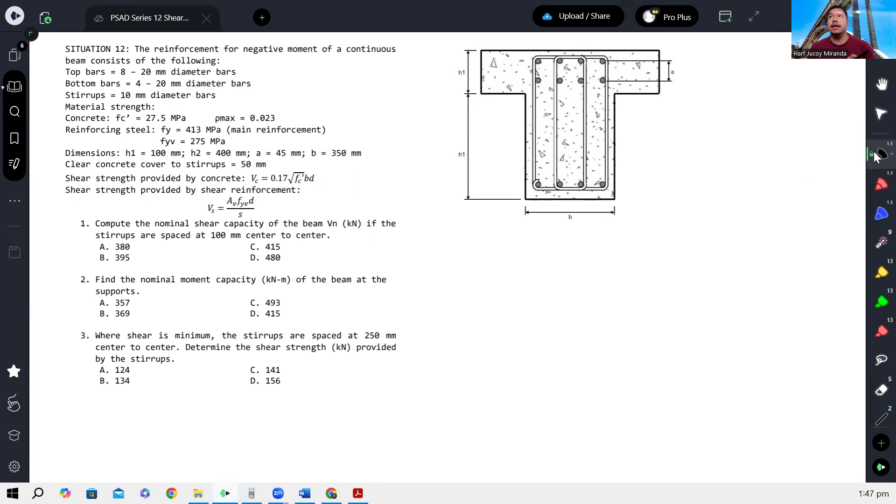Let's start. To calculate the nominal shear capacity of the beam, given the spacing, first we need to understand that when we say beam, the shear forces are vertical. So we expect the shear force to be vertical like this.

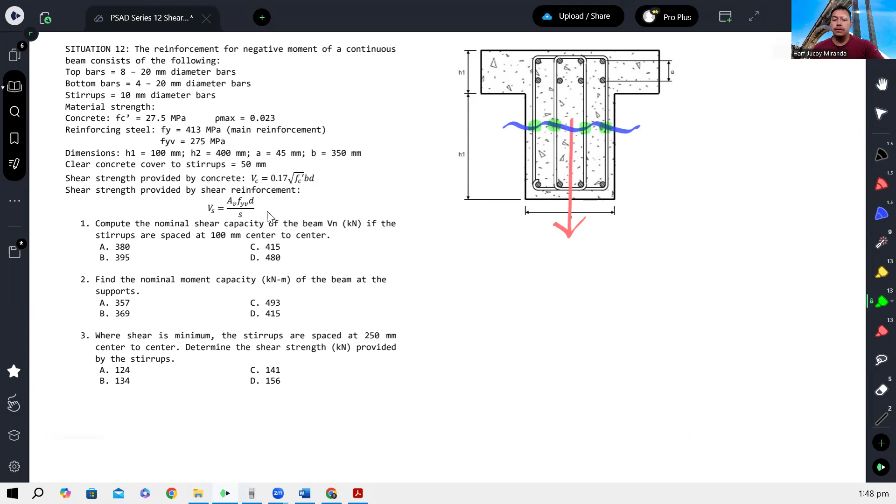To calculate the effective depth, given these dimensions: H1 is 100, H2 is 400, and this is 350. This is A, which is 45.

Now we need to find the effective depth. Recall that the effective depth is measured from the extreme concrete compression fiber to the reinforcing steel in tension, to the centroid of the reinforcing steel in tension.

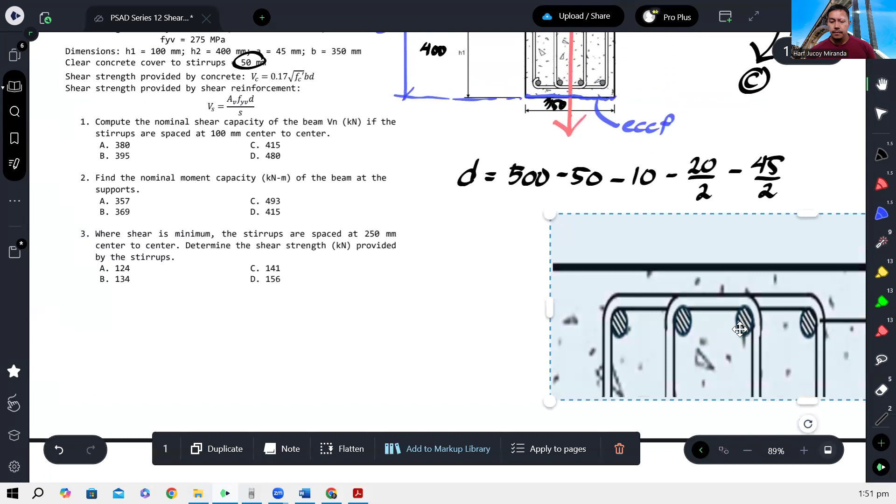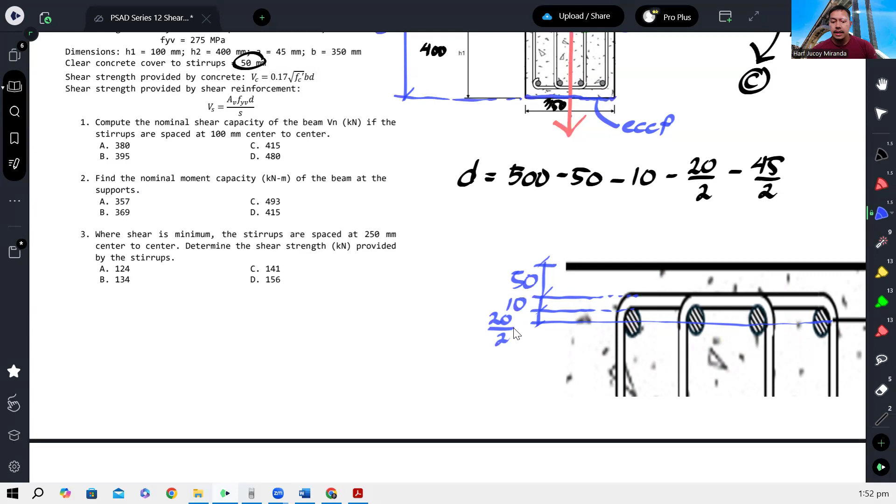So we subtracted down to here, which is the clear cover of 50. Then from here to here is the diameter of the stirrups. Then from there to here is the centroid or radius of the main bar, which is 20/2. And here, the centroid is somewhere here, which is half of A, 45/2. These are all the values subtracted.

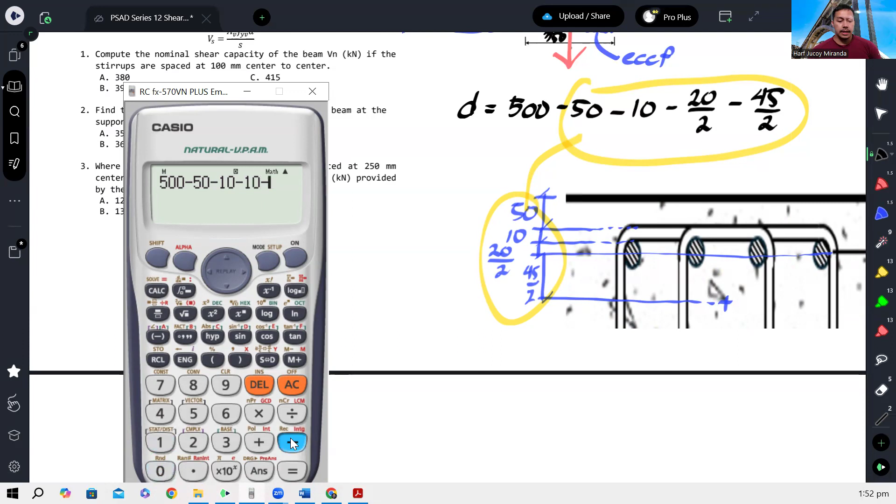So that's the effective depth. Let's compute it: 500 minus 50 minus 10 minus 20/2 minus 45/2, which gives us 407.5 millimeters.

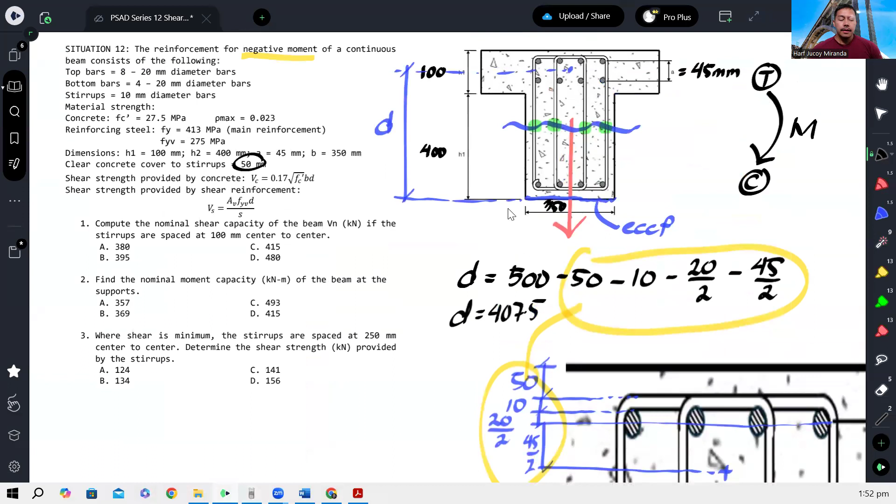Now we can compute the shear strength provided by the concrete first. VC is 0.17 square root of FC prime, where FC prime is 27.5, B is 350, and the effective depth is 407.5. We divide by 1,000 to get kilonewtons: 0.17 square root of 27.5 times 350 times 407.5 divided by 1,000, which gives us 127.15 kilonewtons. That is the nominal strength provided by the concrete.

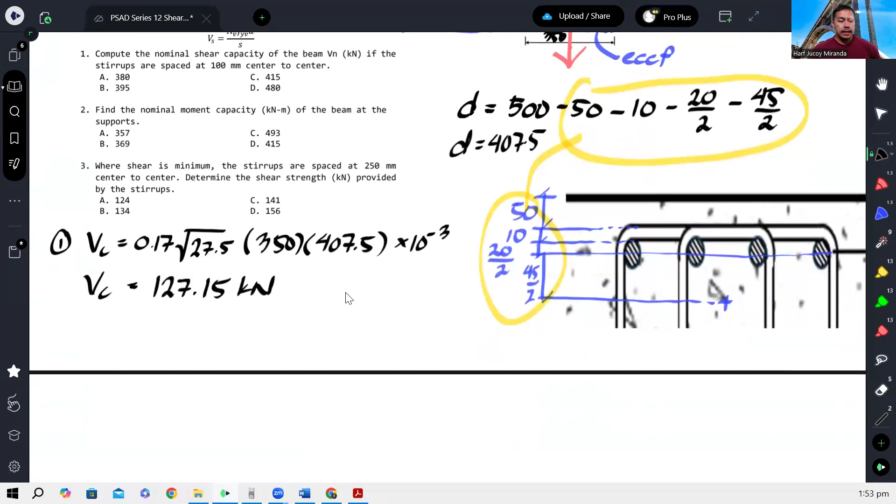Next, let's compute the nominal strength provided by the steel, which is AV FYV D over S. For AV, as mentioned earlier, we have 4 legs resisting the shear force which is vertical, since when the shear force is vertical, the crack is horizontal, and this is the path of the crack.

Yung dadaanan ng crack, yun yung pagbilang natin nung dami ng stirrups na kasali na kukontra dun sa crack. Okay? So that would be 4. So 4 na.

Pi over 4, ang diameter ng stirrups ay 10 squared. Fy ng stirrups ay 275. And then the effective depth is 407.5 over the spacing.

Ang given na spacing for this item ay 100. Again, multiply lang natin to or divide lang natin ng 1,000 yan para maging kilonewton. So we have, so computing ko lang, okay, so our shear strength provided by the stirrup is 352.05.

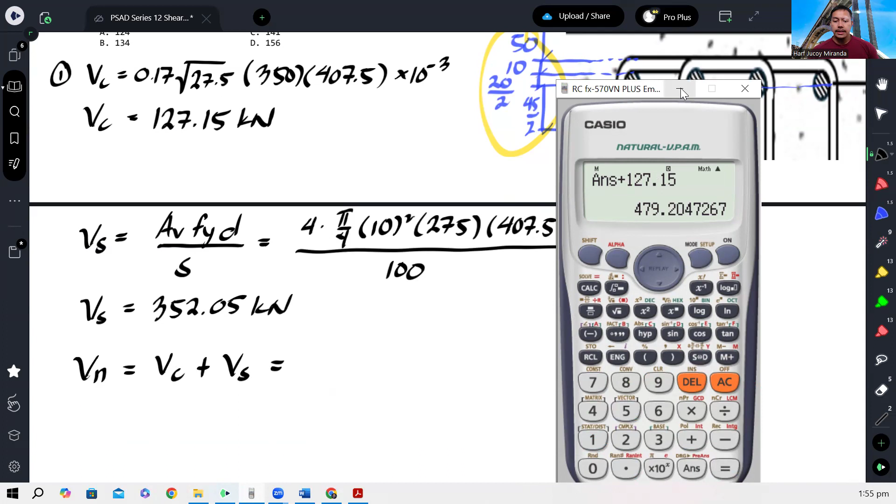Okay, kilo Newton. So therefore, our nominal strength would be yung nominal strength ng concrete at ng steel. So plus 127.15. And that gives us 479.2 kilo Newton. And that will be our answer.

Okay, so dito mag-iingat ha. Ang tinatanong lang kasi ay nominal. Kaya hindi natin kailangan mag-multiply ng reduction factor na 0.75 kapag shear. So ang sagot na natin dyan is letter A. Ay, sorry. Di pala. Letter D pala. 480.

Next, number 2. Calculate the nominal capacity of the beam at the supports. Okay, so at the supports, ibig sabihin, ang ibig niya sabihin dito is, di ba kapag continuous, sabi niya kasi continuous yung beam eh. And continuous.

So di ba pag continuous, kunwari lang ito ha. Ayan, yan kunwari yung beam natin. Di ba kapag continuous, ang mangyayari, may reaction dito. Okay, tapos ang elastic curve niyan, ganito.

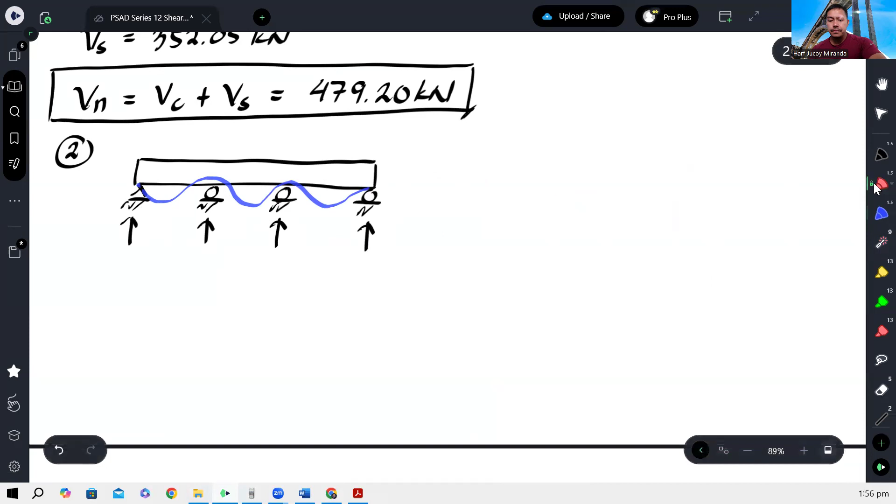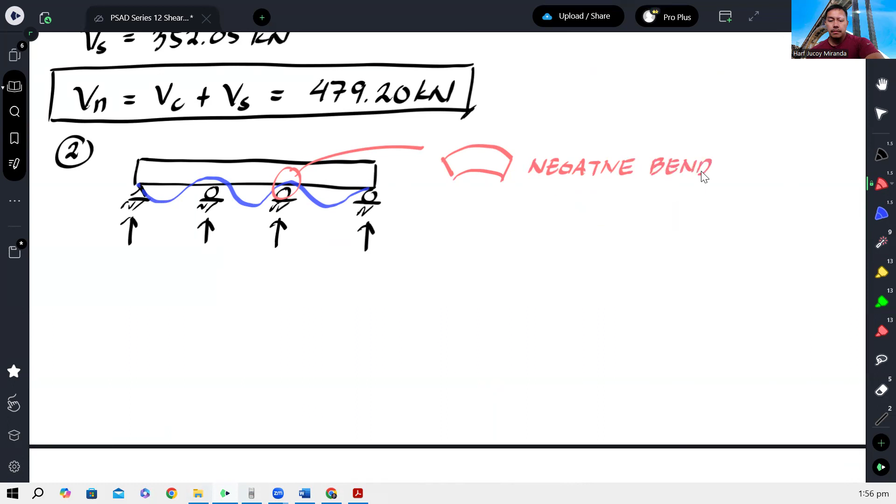Okay, so dun sa support, kung mapapansin natin, okay, yung beam natin is nag-bend ng paganito. Nag-bend ng paganyan. So, ibig sabihin, negative yung bending. Okay, and minention naman yun nung umpisa pa lang. So, ibig sabihin yung moment natin pag ganito.

So, ibig sabihin, like I said earlier, yung top natin is under tension, yung bottom natin yung under compression. So, ibig sabihin, ito nga yung extreme concrete compression fiber. So, ibig sabihin, ito yung steel in under tension, tapos potentially, this is the steel under compression. However, okay, we have to check first if this will have a doubly reinforced action.

Ibig sabihin, mamomobilize ba itong compression steel na ito? O kailan ba namomobilize yan? Namomobilize yan kapag yung steel ratio natin is lumagpas na dun sa maximum steel ratio. Ibig sabihin, doubly reinforced na yung design nung cross-section ng beam. Pero kapag yung steel ratio natin ay mas mababa pa doon sa maximum steel ratio, at binigay naman yun, ibig sabihin, ang action natin ay singly reinforced action lang.

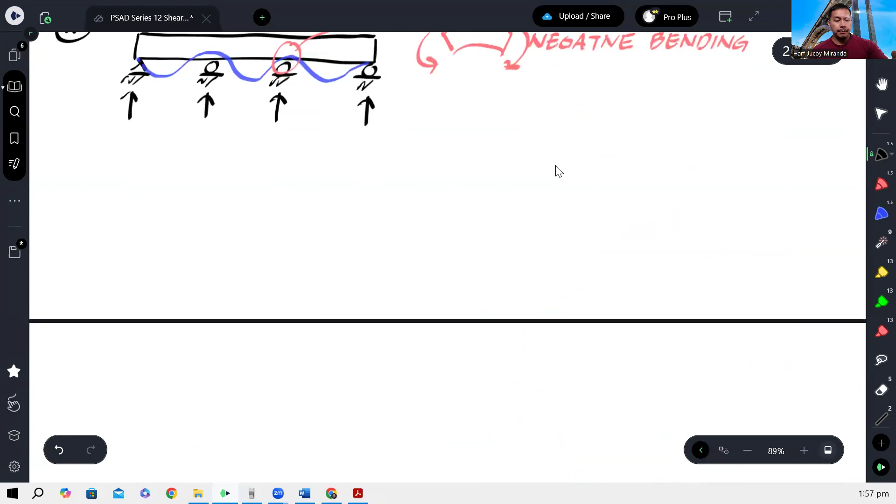Alright? So check muna natin. So i-check natin, assume natin na ito lang yung bakal natin. So ibig sabihin, for number 2, let's check if yung rho is greater than or less than the rho max. Okay, so assume muna natin na yun ay singly reinforced.

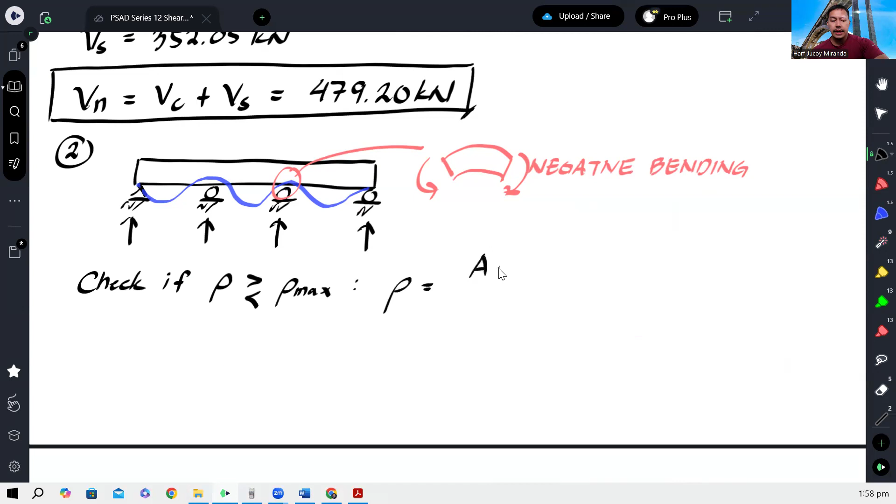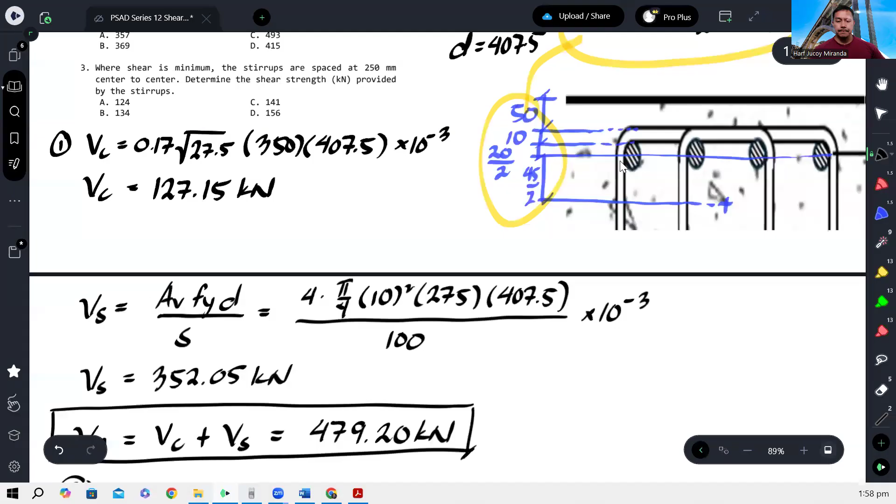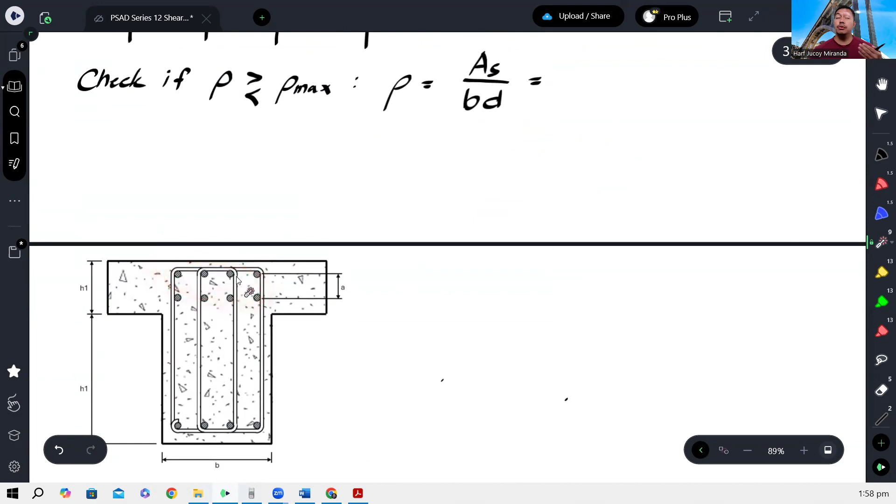So AS over BD. So ibig sabihin yung AS natin is yung bakal lang sa ibabaw. Siguro kopyahin natin to para hindi tayo babalik-balik. Okay? So natin lagay sa baba. Ayan. Okay? So again, ang goal natin ay i-check kung ito ba ay singly reinforced or doubly reinforced. So ito muna kunwari yung bakal, assuming na singly reinforced siya. So ibig sabihin, 8 pi over 4 times diameter ng bakal ay 20 squared over BD.

350 by 407.5. So check natin. Okay, so siguro lagay ko na yung ano ng bakal dito sa ano A over 350 times. Lagay na natin dito sa D yung ano effective depth. So um, 8 pi over 4 times 20 squared. Tapos yung D natin ay 407.5.

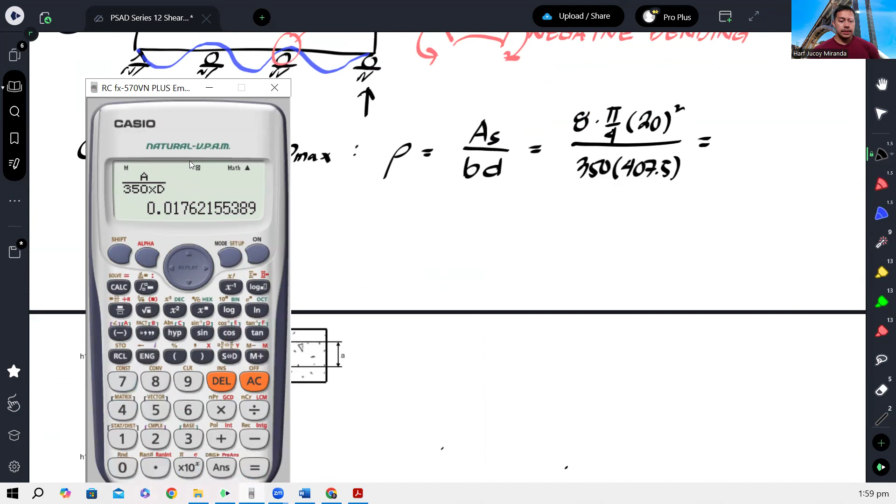Ayan. So 0.0176, which is obviously yung rho natin mas maliit sa rho max. Ang binigay kasi na rho max ay 0.023. Ito naman ay 0.017 sa computation natin. So therefore, this is just a singly reinforced beam.

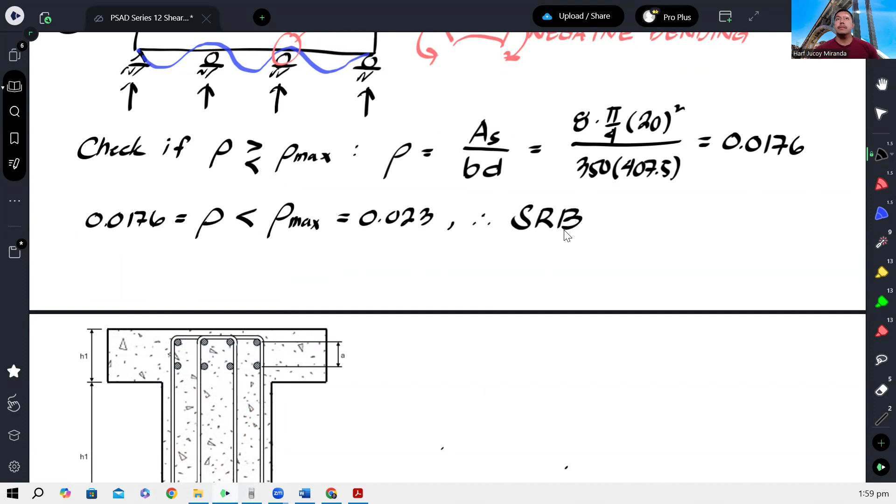Okay? So, ibig sabihin ng singly reinforced ay ine-neglect natin yung magiging contribution nitong mga bakal sa compression. So, ibig sabihin, ito lang yung mag-mobilize yung nasa tension side lang. Alright? So, ibig sabihin, kailangan na natin ngayon malaman kung ano yung depth ng compression block para makompute na natin yung nominal bending capacity. So, once again, okay, pag pinroject natin yan dito,

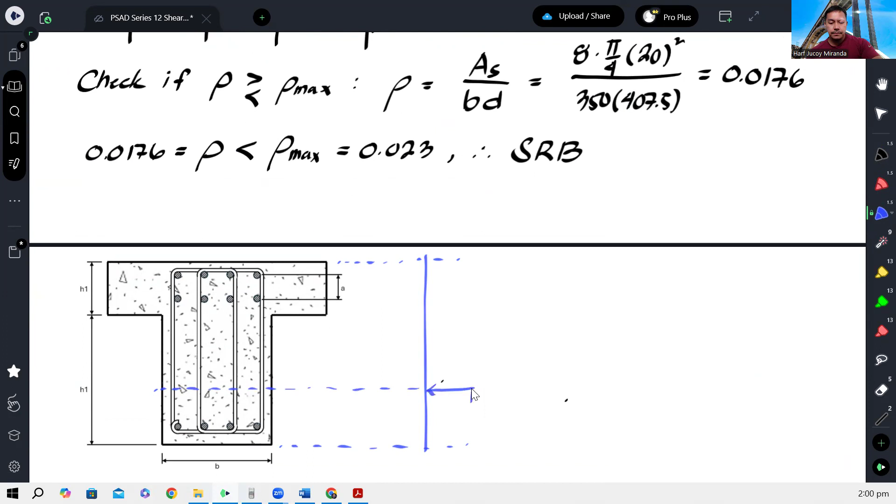Okay, so ito pala sa ilalim. So, somewhere dyan, yung depth ng compression block. So let's say ito yun. No, kunwari yan yung compression block natin. Okay, so ibig sabihin ito yung part ng concrete na under compression. Ayan, no? Okay, so ang dimension ay A, tapos ito ay 350.

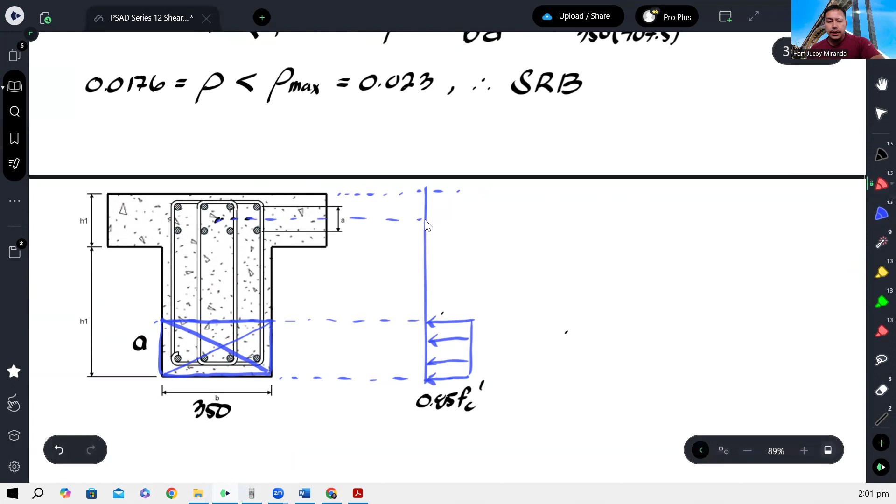Tapos yung stress sa concrete, di ba, equivalent rectangular stress block natin ay 0.85 FC prime. Okay? Tapos itong mga bakal na to, syempre magkakaroon din sila ng equivalent na force. Okay, so ang equivalent force nila under tension, kunwari ito na yon, under tension. So ito naman, yung resultant nito would be under compression. Okay, tapos yung distance nitong dalawa, nabanggit na natin to before, no?

Okay, so that's effective depth minus A over 2. So, mula dito hanggang dito, ito pala, mula dito hanggang is effective depth, tapos kailangan lang natin to ibawas, which is A over 2 yan. Okay, kasi rectangle eh, no? Rectangle kasi. So, ang centroid ay nasa gitna.

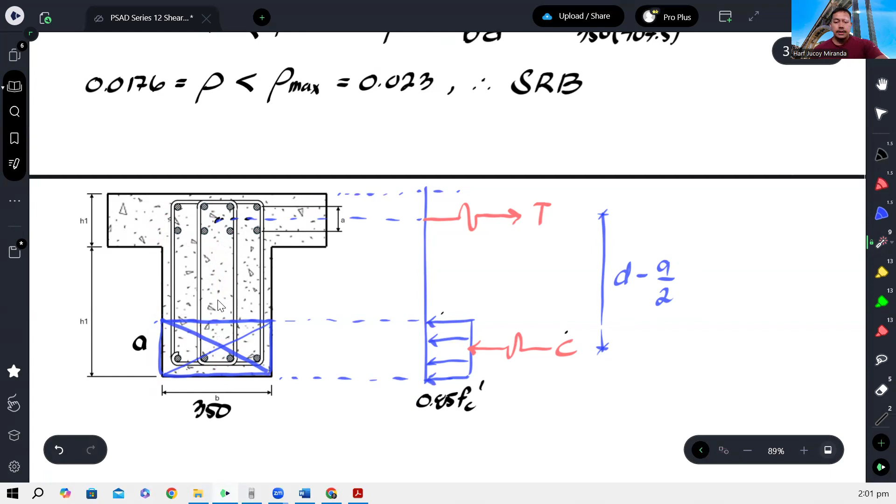Alright, so ang unang gagawin para ma-check kung ano yung depth ng compression block is dapat itong T tsaka C ay magbalanse, no? So, ibig sabihin, pag nag-summation tayo ng forces equal to 0, C is equal to T. Tapos, ano yung C? Ang C ay 0.85 FC prime, yan yung stress, times yung area ng concrete. Ang area ng concrete ay 350 times a.

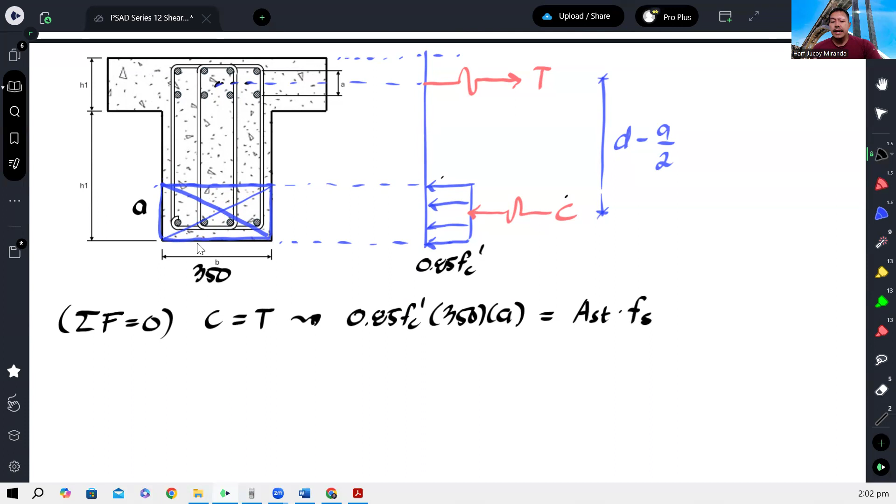Equals, yung T naman natin, dito, dapat, that is area of the steel in tension times the stress of the steel. However, dahil hindi tayo sure, itong problem na to ay investigation. Ibig sabihin gusto nating i-investigate kung ano ba yung strength ng cross-section. Ibig sabihin, hindi tayo sure kung sa design nito yung bakal na nakalatag dyan ay mag-yield or hindi. Okay? So, mag-a-assume tayo ngayon, no?

So, assume natin na ito ay mag-yield muna. Tapos, i-verify natin mamaya. Assume steel yield. Ibig sabihin yung Fs ay equal sa Fy. And then, let's calculate for A. Kampitin natin yung A. So, ang A ay yung area ng bakal times Fy. Ang Fy dyan, 413 over 0.85 times 27.5 times 350.

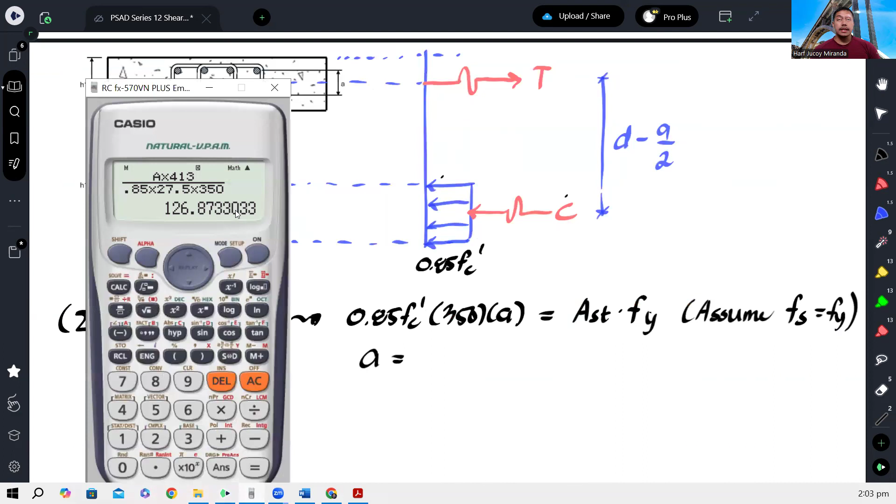Okay? So, check ko lang na kung tama ba. FY 413. Ayun. Tapos 27.5 yung FC prime. Okay, so that is 126.87 millimeter. Yun yung depth ng compression block.

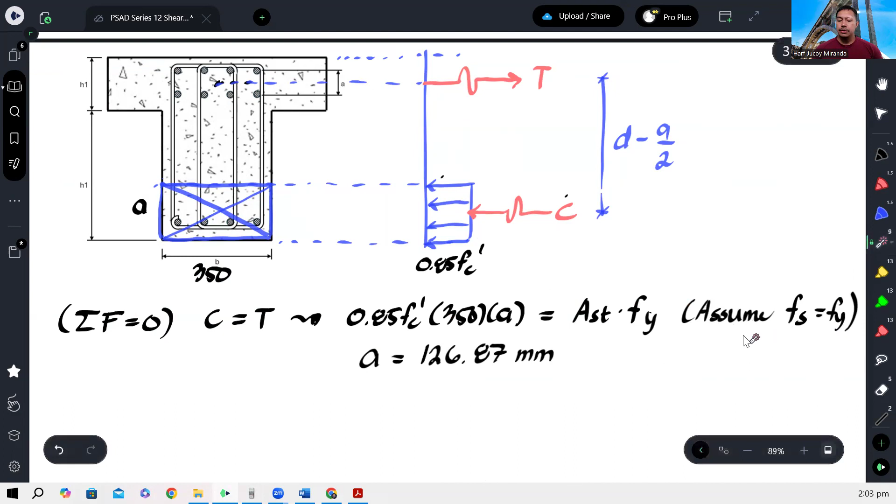Okay, tapos confirm natin kung ito ba ay tama itong assumption natin, no? How to do that? You solve for C. Ang C ay A over beta 1, no? Na kung saan ang beta 1 ay 0.85 if yung FC prime ay mas mababa sa 28 megapascal. In this scenario, mas mababa yan sa 28 kasi 27.5 yung given. So 0.85 na yung gagamitin natin.

Store ko na to sa ano na lang, saan ba? Sa B na lang. So B over 0.85. Okay, ito yung C natin. Store natin sa C, 149.26. Okay, and then yung pang-check natin, yun na lang, check.

Yung Fs natin is 600. So again, ito ay derived mula sa strain diagram. Okay, in the future, I will create a lecture regarding concrete design, no? Para alam natin saan galing itong mga formulang to. But for now, let's work with what we have.

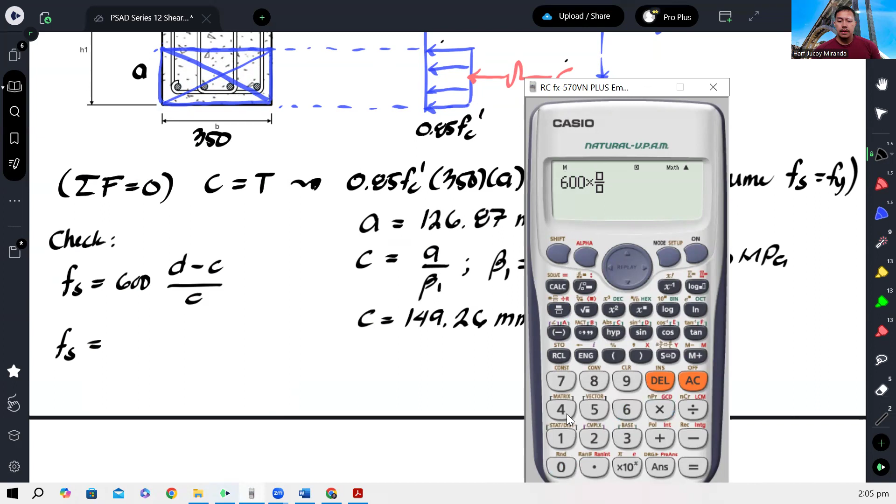So we have 600 times D, di ba? D natin, nilagay ko dito. D minus C over C. So, double check ko lang. Ayan yung D natin. Ito yung C natin. Okay. 1038.05 megapascal.

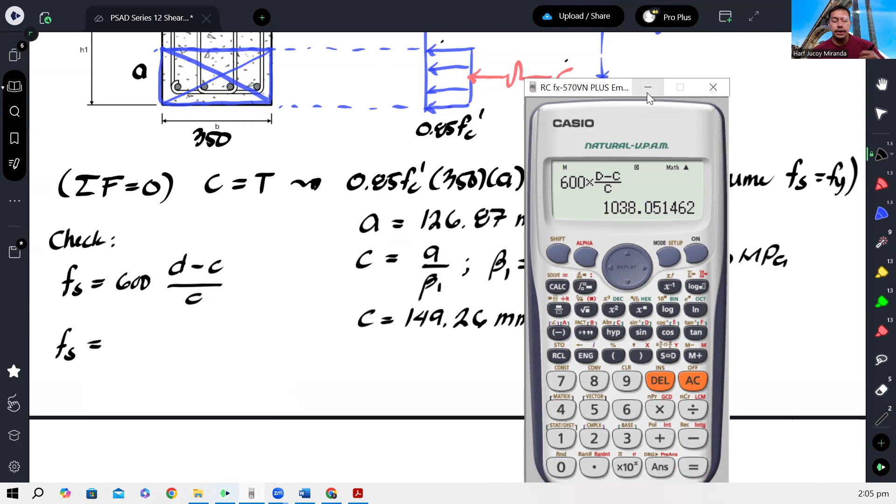So, ibig sabihin, lagpas-lagpas yan sa Fy na 413. So, ibig sabihin, steel yields. Okay. Or we have the correct assumption.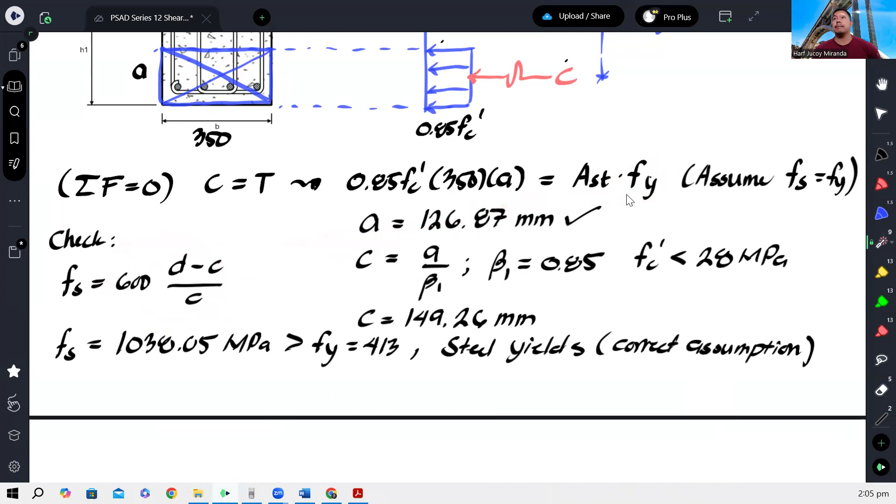Okay. So, ibig sabihin, kapag ganyan, i-adapt natin to. Pero kung halimbawang mali yung assumption natin, i-scrap natin lahat yan. Uulit tayo. Ha? Uulit tayo. So, ang gagawin natin kapag uulit na, ito hindi na FY, FS na siya. So, ito na ilalagay mo doon. Tapos, isosolve mo yung A. Medyo mahaba nga lang. Kaya nga mas practical kung ang una mong assumption is mag-yield yung bakal para maikli lang muna yung computation. Okay? Anyway, ayan na.

So, that's our A. So, therefore, our nominal moment strength. Ang gagawin mo lang, mag-moment ka either sa C or sa T. No? So, sa C na lang para mas maikli. Moment about location of C.

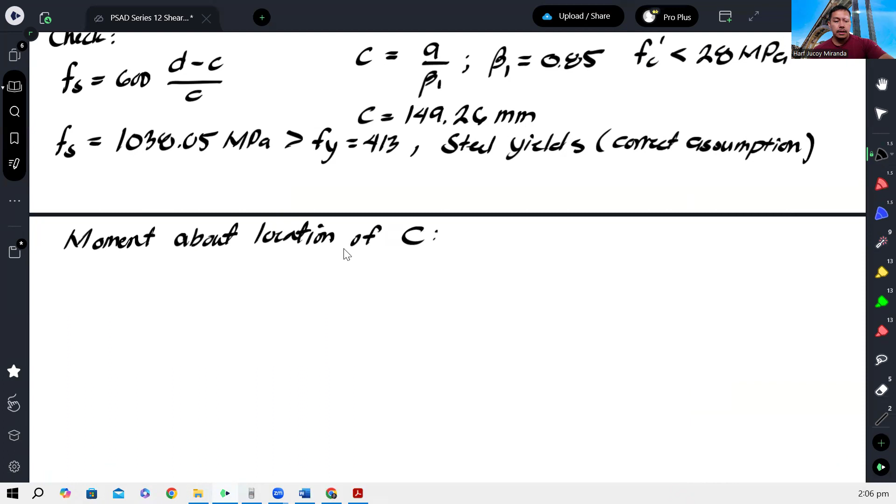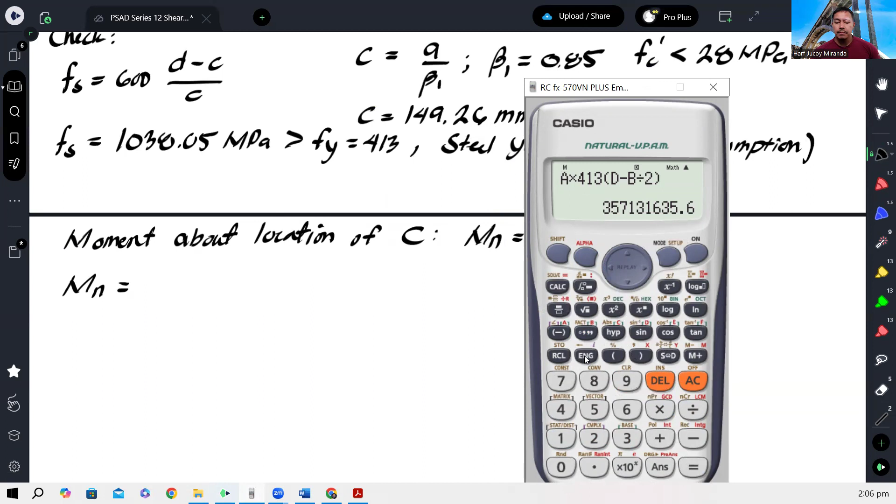Okay, so that will give me nominal moment capacity of T times, ang moment arm is D minus A over 2. Okay, so therefore, our nominal moment strength would be AS Fy D minus A over 2, naka-Newton millimeter. Oh, sorry. Wala pala dito yung A ko. Nandito pala. Check natin. Ayan. Yan yung area ng bakal, effective depth, tapos yung A. So, ito ay naka-Newton millimeter. Divide mo lang ng 1 million para maging kilonewton. So, that's 357.13.

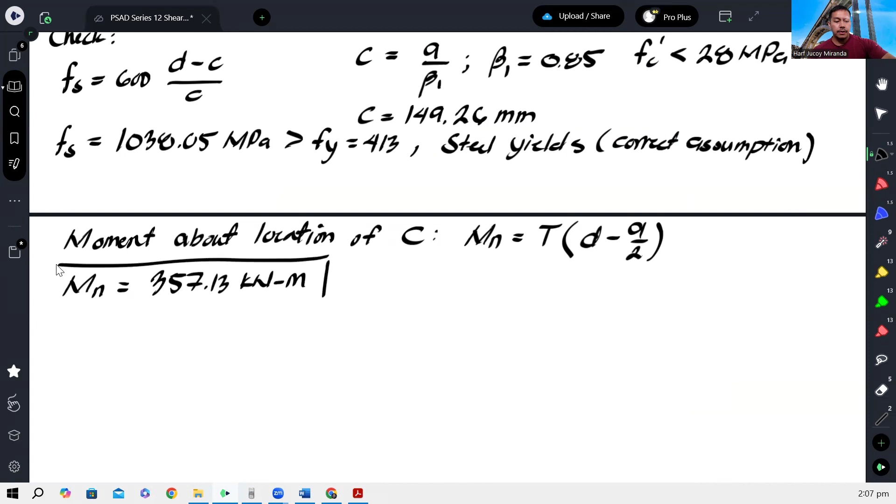And that would be our answer. Again, ang tinatanong lang ay nominal. So, 357.

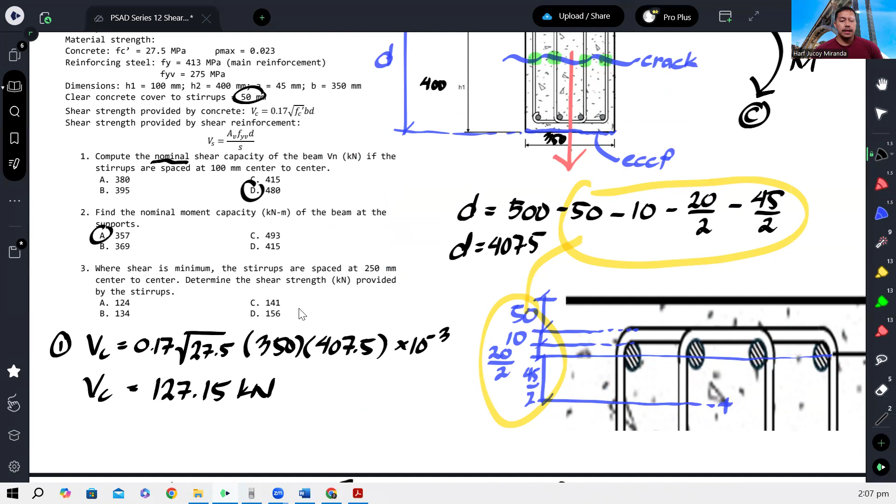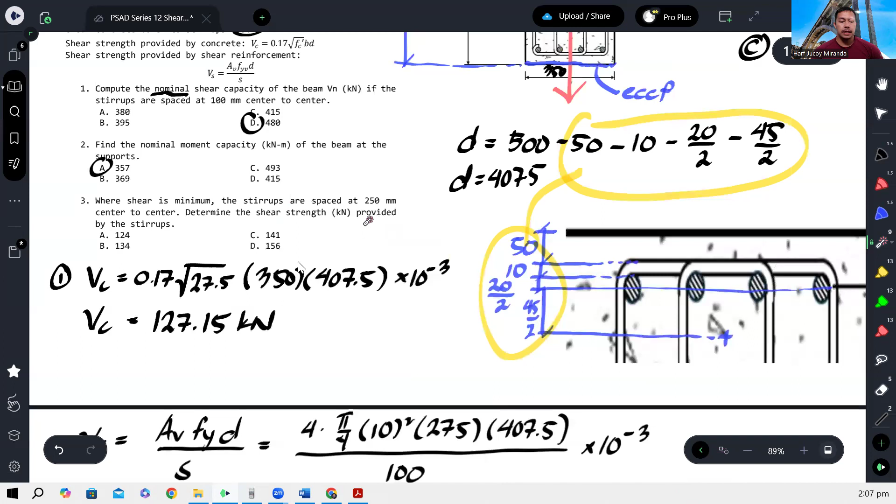And last question, where shear is minimum, the stirrups are spaced at 250 millimeters center to center. Determine the shear strength provided by the stirrups. So number 3, sobrang dali na yan. Ito lang yung i-apply natin. Tapos, gagawin lang natin itong 250. Okay, so for number 3, diretsuhin ko na.

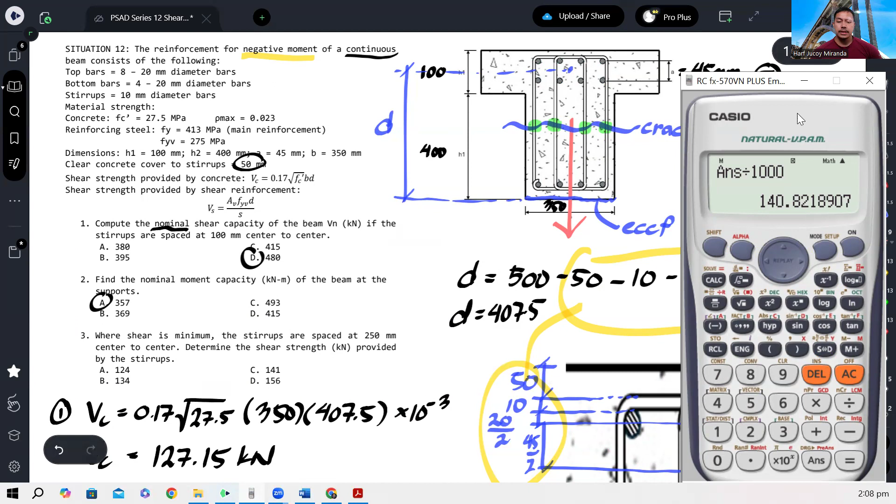So we have 4, kasi apat yung legs. Times area ng bakal ng stirrup, so 10 squared. Tapos yung yield strength ng stirrup ay 275, tapos yung effective depth over spacing na 250. Okay, divide ng 1,000 para maging kilonewton, and that gives us 140.82 kilonewtons, or in this choices is 151... 141. Okay? So that's how we answer this particular problem.